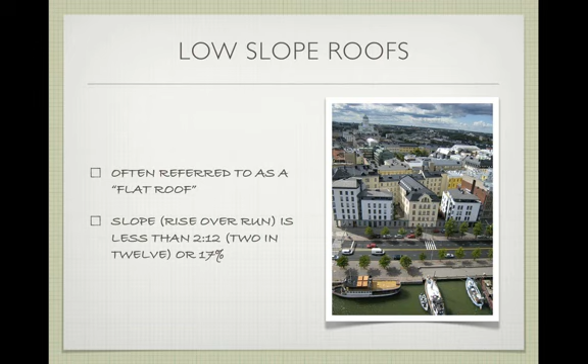The roof deck is the structural surface that supports the roof. We've talked a lot about that already, you should have a good idea of what that would be, but we'll review it a little today as well. We also have thermal insulation—obviously the roof is what's pointing toward the sky, so it's going to get a lot of direct sunlight and has to deal with a lot of heating and cooling cycles, so it's certainly something we want thermal insulation on.

We also want an air barrier, right, that restricts the leakage of air through the roof assembly. Depending on the type of roof we're going for, it may be more or less important, and we'll talk about that as we go along.

We also have something called a vapor retarder or vapor barrier. I will probably mistakenly call it a vapor barrier—we've tried to switch terminology to vapor retarder because barrier is a little too strong, it's not actually a barrier. Some moisture can always get through these, but we try to make it as barrier-like as possible. This is essential in cooler climates where you're enclosing a humid space, because you'll get condensation on the warm side of the insulation. You'll get condensation wherever you have cool and warm coming in contact.

And so that's the risky part, and you want to control where that happens in your wall assembly to make sure it occurs in the right spot, not in the wrong spot. We'll talk about that at length as we go along.

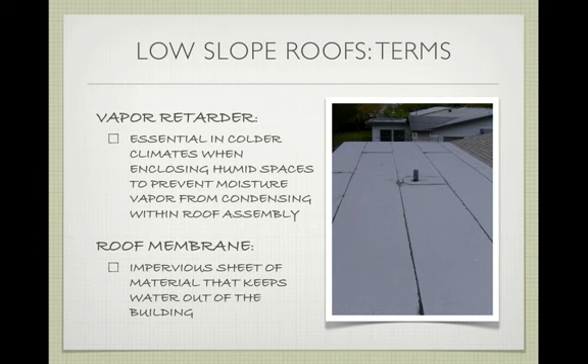We also have to think carefully about drainage. How do we remove that water, especially if the roof has a slope that goes in toward the building? A steep roof is not that hard, we can obviously see where the water is going to go. If it's a flat roof, we have to think a lot more carefully about drainage to collect and deal with the water that comes off the roof membrane.

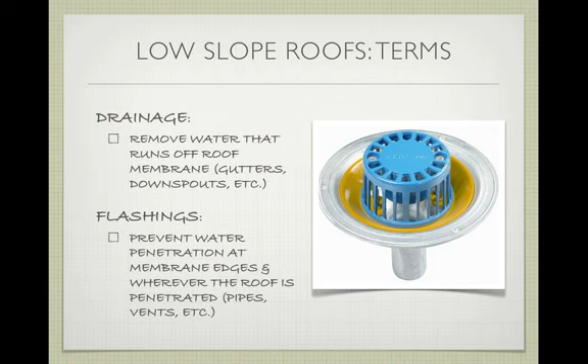And then we have something called flashings, which prevent water penetration at joints, edges, protrusions. You have a pipe that comes through the roof, a chimney, something like that coming through the roof. Flashing is what's going to deal with that and make sure that the water doesn't penetrate where we don't want it to. So now we'll expand on each one of those topics as we go forward.

We'll start with roof decks. Roof decks are the thing that we've already covered pretty extensively in the class. If you think all the way back to concrete, which I know seems like it was ages and ages ago, a simple roof deck could...

...be a concrete slab. Obviously, it's not a slab on grade, it's a slab up in the air, but it's a structural support for the roof. And obviously, on top of that structural support, we have to put the roofing. But it could be something as simple as a concrete slab.

If we were talking about light wood frame, it would be the platform that would be the assembly of all the joists, or excuse me, it's in the roof, so it would be rafters. All the parallel rafters with the sheathing attached to them. That would be this roof deck support for the roof.

If it was a steel building, we might have a structural composite deck where we had that corrugated piece of steel with concrete on top. That would be providing the deck. So it varies, and it's based on the stuff that we've already talked about earlier in the course.

The deck needs to be stiff under expected roof loads. So if we're going to get serious loading that's happening, we don't want part of the roof to sag. That would defeat the purpose of the roof. So it needs to have sufficient support to support whatever it needs to support.

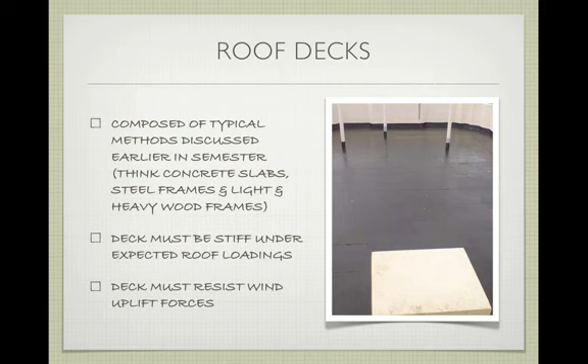Decks need to slope sufficiently toward some drainage point, and that drainage point could be off the edge of the roof. It could be to some internal drain that we're actually collecting the water, piping that through the house, and then getting it out down below, despite all of the structural deflections that might be in the roof.

So if you put an air conditioner up on the roof and it's really heavy, the roof still needs to have sufficient slope to actually drain the water off. What you don't want is for there to be a puddle around the air conditioner. And so we need to make sure that it has that.

The minimum slope for a roof that's considered to be a flat roof is 1 in 50, or about 1/4 inch per foot. So it's really not too much slope. That's why we consider it flat. But it does have a little bit of slope, and it does shed the water in one direction or another.

So here's an example of getting a roof ready. This is a flat roof, and this would be our structural deck underneath. We're seeing sheathing that's been applied here. It looks like it's 1x12s or something like that. I don't know what this building was.

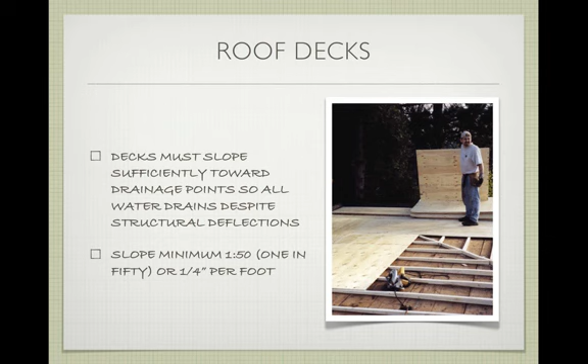On top of this, when they're re-roofing it, they put these little tiny sleepers in. If you look carefully, it's narrower here than it is up here. They're designing these sleepers to make just a little bit of slope before we put the roof membrane, or the insulation depending on the roof environment, to make sure water that falls here actually slopes away. This is like a little mini ridge or hip causing this half to drain that way, this half to drain this way. It's very subtle, but that's the right way of making sure you have that kind of drainage.

You don't necessarily have to do it with a set of sleepers on top of a flat roof. You could adjust each one of the individual joists so that they have a little bit of slope to them, or shave each joist so it's narrower on one end and taller on the other to get that slope. Those two methods take a little bit more work and pre-planning than putting sleepers on after you have a nice solid roof deck.

It's going to vary depending on your current conditions and how you're building. We can vary the heights of the columns underneath - let's say this was a steel building, we can vary the height slightly to get that slope. That's one way. We can apply flat or tapering insulation to try to get that slope, rigid foam or some kind of lightweight insulating concrete. You could actually put a lightweight concrete deck on top of your structural deck and have that have the slope to it. So there's a variety of ways - the point is, it has to have slope, even if it's a little bit.

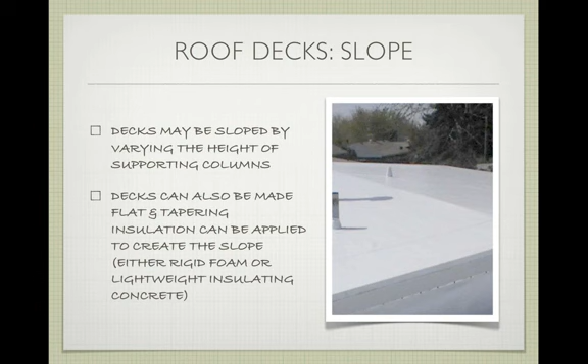So why is this a big issue? If you have insufficient slope, you can have something called ponding. If you've ever been in a tall building and looked down on other shorter buildings after a rain, there's a lot of this that happens on roofs. This is a very dangerous thing to have happen. What we mean by ponding is that when water is applied to the roof - rain, snow, etc. - there are areas of the roof that don't have sufficient slope and puddles form. It's like puddles that would be outside, but these are a little bit worse for what they do to the building.

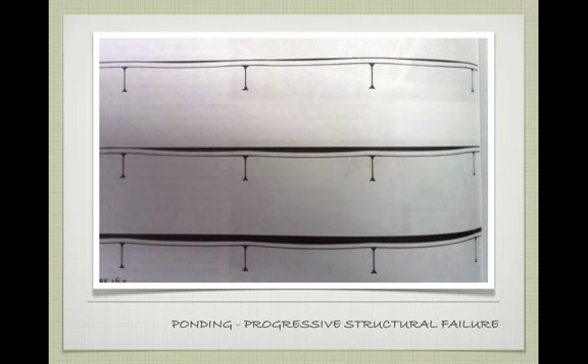Number one, ponding can destroy the roofing membranes themselves, which leads to leaking, and if you get sufficient leakage, that could cause rotting of the structural members and ultimately structural failure. The other thing is, as the ponding grows, we're adding a lot of weight to the building. How much does water weigh per gallon? It's like 8.5 pounds. So if you think about ponding - gallons and gallons of water, you're adding weight each time the rain falls. If it's not draining off, it's adding weight to the building, and as that happens, the roof starts to sag and we start to have problems. Make sense so far?

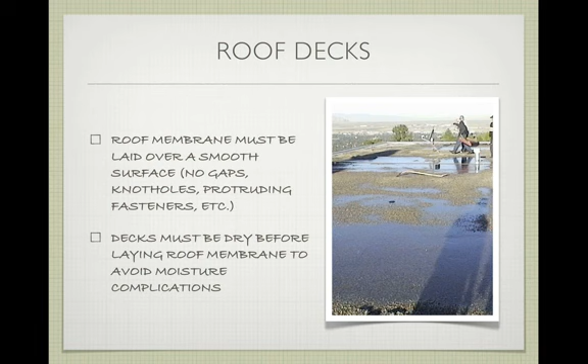The other thing is that decks need to be dry before you apply this membrane, to avoid moisture complications like mold. You don't want to be applying one of these roofing membranes in the rain when it's wet - you want to make sure the roof deck is actually dry.

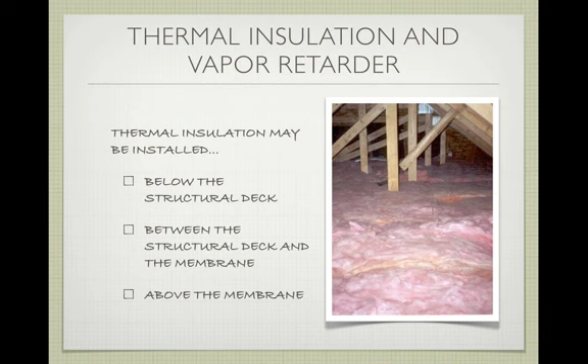So, thermal insulation and the vapor retarder. The thermal insulation can be installed in 3 places: below the structural deck, between the structural deck and the membrane itself, or above the membrane altogether. So we have 3 different locations for it, and we'll talk about what those mean.

So the last piece of this puzzle is the vapor retarder, and we're going to talk about where it belongs in the next 3 slides, and hopefully that'll help a little bit more.

The discussion about a vapor retarder varies depending on where we are and our climate. What we need to pay attention to is what is the warm side and what is the cold side. If we're in California, in the Bay Area, the definition of warm side and cold side is a little problematic, because in the middle of summer - or even right now, almost May with air conditioners starting - the cold side might be inside and the warm side might be outside. In the middle of winter it's exactly the opposite: the cold side is outside and the warm side is inside.

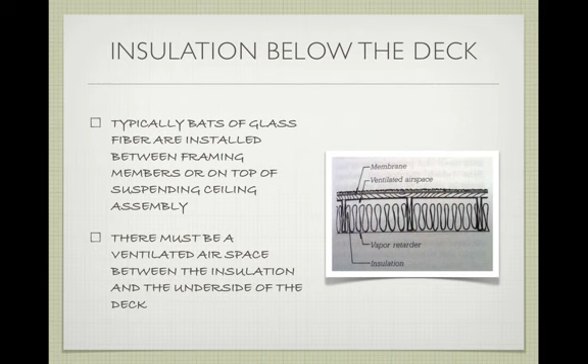If we flip things around, say we were in Hawaii, and we wanted the inside of the building to be cold, with the outside being the warm side—or maybe it's the desert—we would change the position of this vapor retarder to be on the warm side of the insulation. So the vapor retarder would be on the outside of the insulation rather than the inside. Does that make sense? Because we want that condensation to form on the outside of the insulation. So it's going to vary depending on your climate, and that's the important thing to understand.

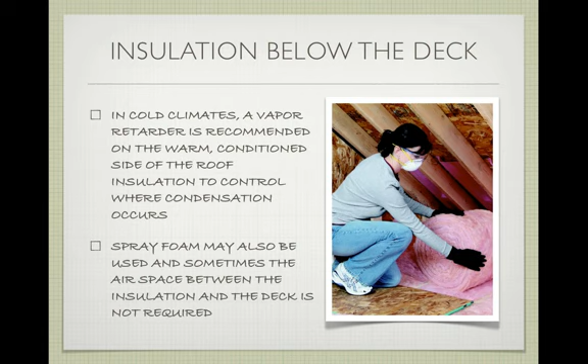In cold climates, this is basically what we talked about: the vapor retarder is recommended on the warm conditioned side of the roof insulation to control where the condensation occurs. You can use spray foam depending on the type of insulation and the type of deck you're going to use, but again, the vapor retarder is still very important.

In cold climates, remember the vapor retarder needs to be installed below the insulation, which is a bit complicated and a bit awkward in terms of placement. So what you'll end up doing is using a special topside vent that will allow that moisture to come out—specialty vents put in for this kind of situation, just to get rid of any moisture that might condense.

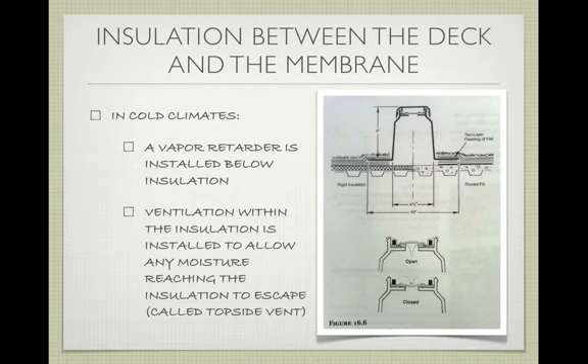So where you put that vapor barrier varies. Likewise, if we switched climates—I'll stick with cold for the most part, but recognize if we switch to Hawaii, we'd have to change the placement of the vapor retarder—what about putting insulation above the roof membrane?

This is usually called a protected membrane roof, meaning the membrane itself is protected from temperature extremes—we no longer have extreme hot or extreme cold right on the membrane since we've got the insulation in there. It also means the membrane itself acts as the vapor barrier, because it's a waterproof barrier, so we don't have to worry about a separate vapor retarder or vapor barrier. That's also an advantage.

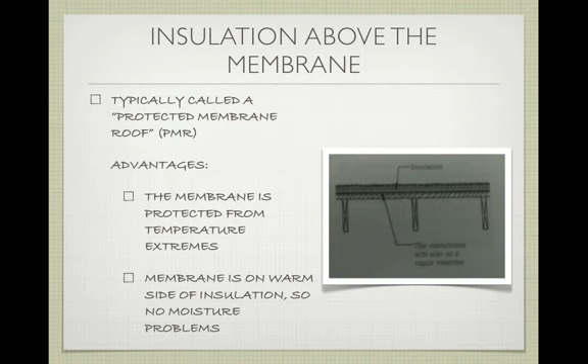The disadvantage is that the material needs to retain its insulating properties when it's wet. Fiberglass batts are the worst example of this—you lose almost all insulating value if the fiberglass batt gets wet, which is why if you have severe water damage or a flood in your house, you're worried about that insulation and need to get it out and replace it with new insulation. So we need to make sure the insulation can be exposed to water and doesn't degrade when exposed to water.

Some types of foam are fine, other types are not. They might soak up water or resist water. The other thing is that the membrane can't decay or disintegrate when it's put out in the sun. If you've played around with foams, some you stick out in the sun and they start to deteriorate in the weather, while others retain their rigidity and insulation properties. So it's going to vary a little bit.

So this is an example of one of these assemblies. Sometimes they'll put this little skin on it that'll help with sun, and it also helps with traffic so you don't accidentally dent it or destroy it. There's our insulation, down here is our roof membrane, and below that is our roof deck itself.

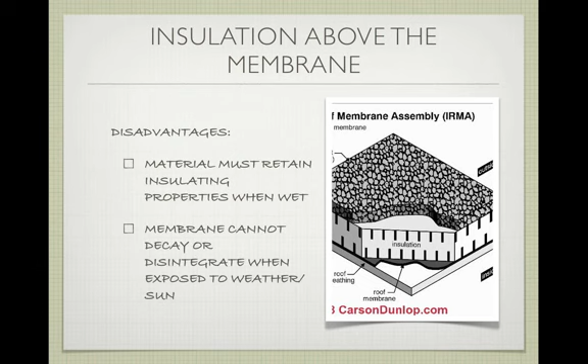In terms of thinking about rigid insulation as a material, it should have high thermal resistance. Obviously the point of insulation is not to allow heat or cold to come into the building, so it needs to have high thermal resistance. It needs adequate resistance to compression, denting, gouging, decay, and fire. This shouldn't be too hard to imagine - if you walk out on it and it compresses, that defeats the purpose of the insulation, so it needs to be able to support some weight.

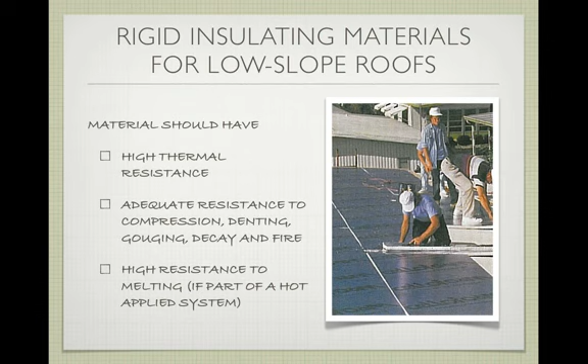It also needs to have high resistance to melting if it's part of some kind of hot applied roof membrane itself, which we'll talk about in a second. So if you're applying a hot membrane as your roofing material and you put this insulation in, it can't melt - it needs that high heat resistance.

In a low slope roof, there's typically two layers of an asphalt saturated roofing felt, which I'll pass around an example of, that are adhered to the roof deck with hot asphalt. And so this is acting as the vapor retarder in this low slope roof.

You can use what's called the self-adhering bituminous membrane, which is also very common. So this here would be the self-adhering membrane - when I pass it around, go ahead and peel a little bit back and you can see that it's sticky. So this would be a cold applied system. I can take a roll of this, peel off the backside, and stick it right down to my deck. That's cold applied - it doesn't require any heat.

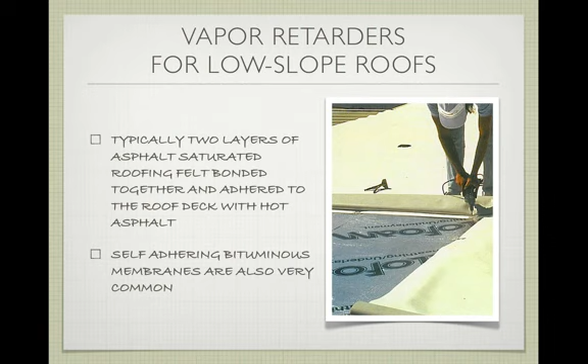Or we could have roofing felt - that's probably the best example. A piece of roofing felt is an asphalt impregnated felt. Think of asphalt like we drive on, it's a distilled petroleum product that's been saturated into a felt. So we're taking two layers of this with some very hot asphalt at the same time, and we're applying those two layers together to create this membrane. Does that make sense? I'll pass this around so you can see that, but we're going to talk about it in far more detail as we come up here.

Exactly, and that sticks the whole thing together, and that would be considered a hot applied application, because you have to heat up the asphalt to cause them to stick together.

So the vapor retarder must be located within the assembly on the warmer side of the insulation - we should have gotten this by now - except on a corrugated deck, where you need some kind of substrate board across the decking prior to the application of the vapor retarder. I don't know that I actually have any vapor retarder up here, but you're all familiar enough with plastic to know what I mean - you can think of it as a sheet of plastic. There are smart membrane materials that allow some water to penetrate one direction, but you get the idea.

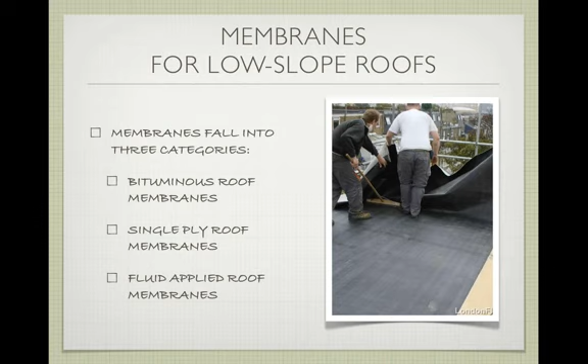Generally speaking, membranes fall into three different categories: the bituminous roof membrane, the single ply roof membrane, and the fluid applied roof membrane. We're going to talk about what they all are and the advantages and disadvantages of each. So we'll start with what's considered the built-up roof membrane.

It's assembled in place from multiple layers of that asphalt impregnated felt. We keep losing some of our ballast on this example year after year as it's being passed around, so be somewhat gentle with it. But this is the best example of seeing those layers built up - this is a piece of roof membrane that's been cut out, and if you look carefully at the side, you can start to see the various layers of that asphalt felt.

And then on the top, this last surface, which is rocks, is a ballast, which we'll talk about in a second. So pass this around, but it can help you see the thickness of these layers as they start to come together.

The felt that we're going to use, like the sheet that I passed around, is delivered to the site in a roll. The width of the roll varies a little depending on the equipment used, but it's going to look something like this. In this particular example, they're actually loading it into a machine that helps roll it out, which definitely assists the process.

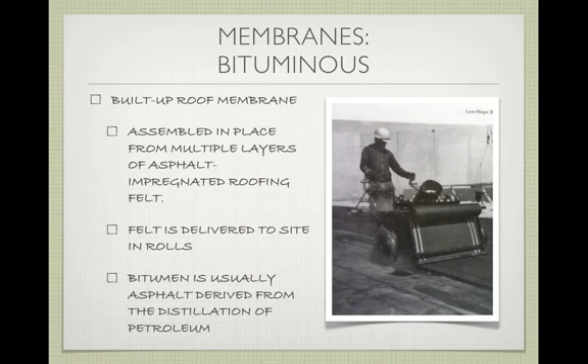The bitumen is usually an asphalt derived from a petroleum distillation process. So it's not the asphalt we think of that's out on the highway with rocks already embedded in it—it's more of a liquid product that helps these layers adhere together. It's applied hot in order to merge the saturant already in the felt with the new saturant we're putting in. So it's basically like saying you have something already filled with glue and you add a little more glue to bind the two together.

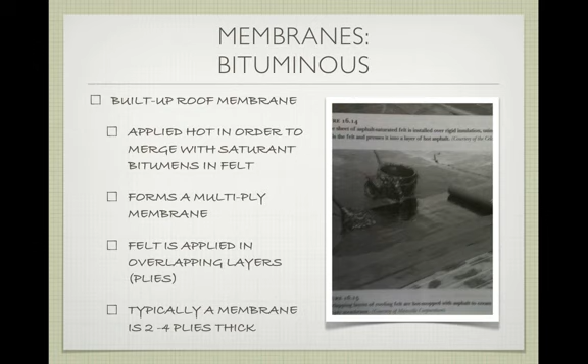It forms a multi-ply membrane, and the felt is applied in overlapping layers, which is important to make sure the seams overlap so you don't have a crack that goes all the way through. It's kind of like shingling in a way. Typically a membrane is going to be anywhere from 2 to 4 plies in thickness, and a ply is just one layer of these.

The last piece is that there's a layer of crushed stone, or a layer of rolled roofing that already has mineral aggregate put in it, something like this. That provides a protective layer on the top surface, both from the sun and from potential traffic. There are other ways of making sure traffic areas are more protected, but you want something on top of that roof to protect it from traffic.

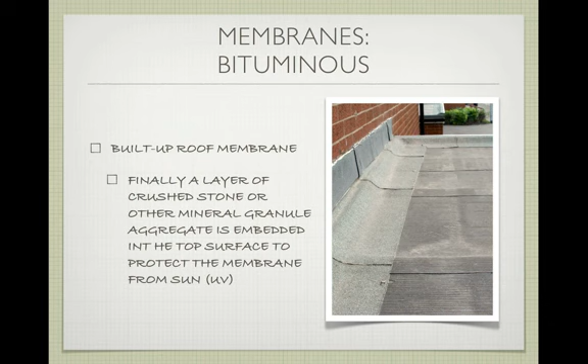So let's look at the actual drawing. In this particular installation, we're putting our asphalt here. You know, sometimes you get so tongue-tied that you just can't get out what you're trying to say.

So in this particular example, we have a concrete deck—that's our supporting surface. On top of that, we have an asphalt primer coat, which is basically a hot asphalt that's been applied to the deck itself to seal it up and give us a good surface to adhere the felt to. We're going to lay down overlapping layers of this felt. On top of that, we're going to put in some more asphalt.

Then we're going to put our rigid insulation boards down, and on top of those rigid insulation boards, we're going to put an aggregate. So this particular assembly is where the roof membrane, all the layers of felt, are below the rigid insulation—this is where the insulation's on top.

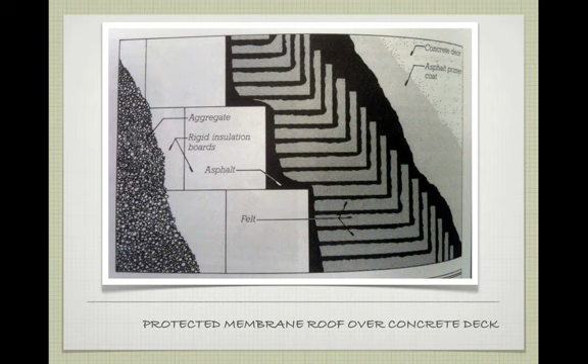When we move on to the next slide—well, I guess I don't have it, we'll see that slide in a little bit—we have some other options that are also available.

It's a lot like something like this. This one doesn't have the adhesive on the backside, but it's a lot like something like this, where instead of a felt, it's actually a synthetic product that's stronger and more water resistant. We can swap that out for the felt, so it's not going to be a hot applied system, it's going to be a cold applied system. But you guys get the idea. I apologize I don't have one—I thought I did have one, but I don't.

So this increases the flexibility of the material. It allows it not to crack as easily in different temperature extremes. It's a little bit more like switching from regular wood into an engineered lumber product - we're trying to use our knowledge of technology to improve what we're actually using, so it's a little bit tougher.

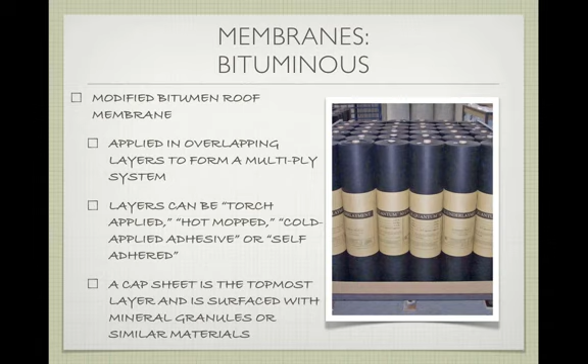When you're designing your units, are you choosing what type of roof and insulation before construction, or does that happen during construction? It should happen before - that's a good question. Because you as the architect or engineer should have knowledge of what type of roof you're going to do, since it's going to vary a lot in the construction process.

If you're doing batt insulation on a light wood frame, you're going to be doing the roofing one way. If you have corrugated steel like this, you're going to do it differently because of the surface it presents to you. If we had a slab surface, we'd do it differently - if it's a slab, we have no cavity to put insulation below the deck, so we have to put it on top, and then it's a matter of deciding whether we want it underneath the membrane or on top of the membrane, which depends on what you're trying to do.

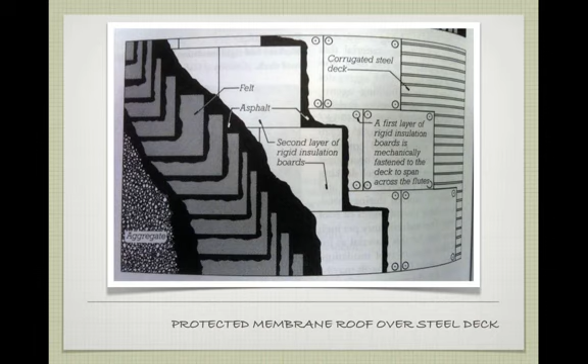What product you're trying to use, which you probably would specify. What look you're going for, how much traffic is going to be on the roof - all of those things come together, and you as the designer should probably decide that in advance. That said, it's probably not decided 100% of the time. You could get to the point where you hire a roofing contractor and they just do it. But it depends on the scale of the project - if it's a large project, it's going to be decided ahead of time.

So the other thing we can do, instead of having these multi-layer, multi-ply assemblies, is have something like these single-ply roof membranes that I'll pass around in a second. They have some serious advantages - it takes a lot less labor to roll out a giant sheet of this single-ply roof membrane across the entire roof, fasten it down, and move on. We don't have all these layers coming into being. It's also very strong, very durable, and very elastic. It works as a sheet that almost floats across your roof - kind of like covering your building in plastic.

But if you look carefully, especially that one which has fuzzy edges to it, those are nice strands either of fiberglass or another very strong material in tension - and we'll talk about glass next week actually being stronger than steel in tension. So you're using a lot of really strong materials to engineer this roof membrane, so it's a lot stronger.

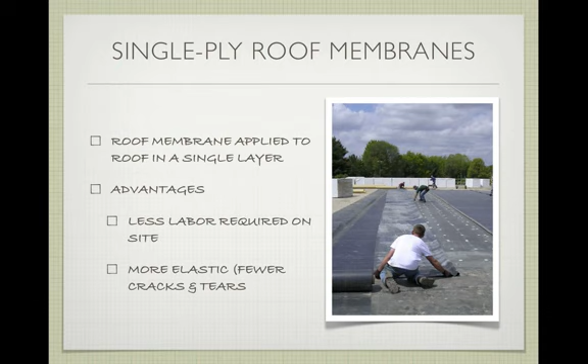That said, there are some serious disadvantages to using something like this. It needs to be affixed to the roof by either an adhesive, some kind of ballast, or a mechanical fastener. If we're using adhesives, the adhesive has to be compatible with whatever this roofing membrane is - we can't use hot asphalt if the single-ply roofing membrane isn't resistant to that heat. We have to know the chemical composition so the chemicals in the adhesive don't degrade the membrane itself. If we're using ballast, that just means covering it with rocks or something to weigh it down - you run the risk that those rocks have something that could puncture the single-ply roof membrane, which is problematic. Obviously you don't want it punctured. Or you need to use some kind of special fastener, and this is where it gets tricky, because you've got a fastener attaching this to the roof which is a potential point where it's going to leak, so you have to make sure it doesn't leak.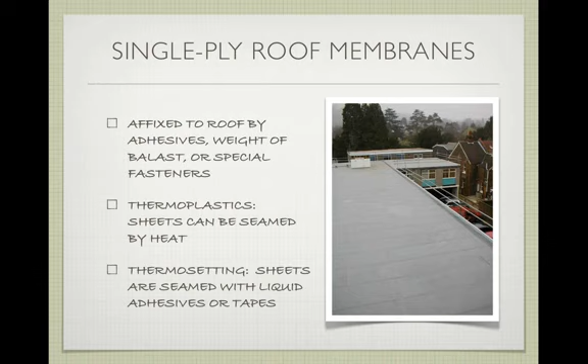So we have thermoplastics - these are sheets that can be seamed with heat, they're designed for that. We have thermosetting sheets - these are seamed with a liquid adhesive or a tape or something like that, because you might not get a complete sheet that can cover your entire roof. You might have to piece them together, so you need some way of doing that.

The big problem with something like that is there's only a single layer. So if something were to happen to that topmost surface, that membrane itself, some little nick, you don't have any redundancy. If you have a multi-layer, say 4 plies of roofing felt, and something happens to the top layer, it's not the end of the world - you've got 3 more layers to help stop the water. If you have something like this that's only a single ply, you have to be much more careful about any little nick, because that could really cause a big problem instead of a little problem.

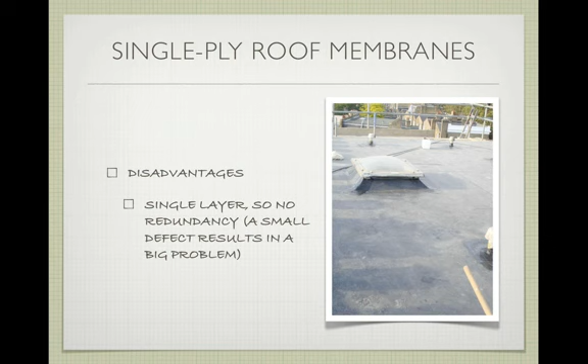So one more note about those single-ply roof membranes. I did one job that had one of these single-ply roof membrane roofs on it. Jonathan, you have a question?

So anyway, I did this one project where we had one of these roofs, and we needed to cut a vent through the roof to exhaust the dryer. We were putting a laundry room inside, and the only way to vent this particular laundry room was part of a 4-plex.

It had to vent out through the roof—that was the specification the city gave us. So we had to cut through this membrane, which is inherently challenging because the whole point of having one of these nice seamless membranes is not to cut through it. We ended up hiring a roofing contractor, even though normally we'd handle roofing ourselves, because it was a specialty thing. It was a special membrane, and they had to work around it with other types of membrane that had the right thermosetting properties to seam it in. It's the kind of thing that makes me really nervous, just having this one membrane.

Right? What does the person choose? It could be cost, right? Yes, it costs a little bit more, but the labor cost is much less. Sorry, clearly I forgot to put my phone on vibrate.

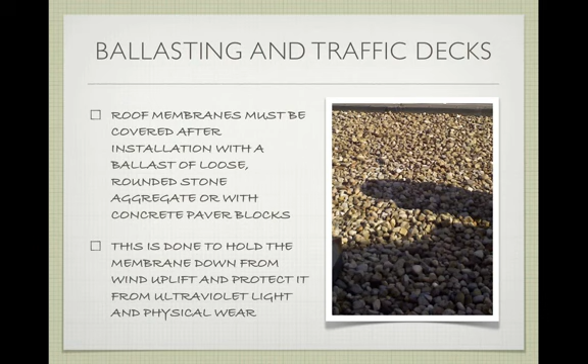It protects the roof membrane from ultraviolet light and from physical wear, which is actually a pretty big problem. So if we want to make a rooftop garden, we need to cover up this roof membrane with a material that allows us to walk on it. That's what a traffic deck is designed to do - it gives you a walking surface.

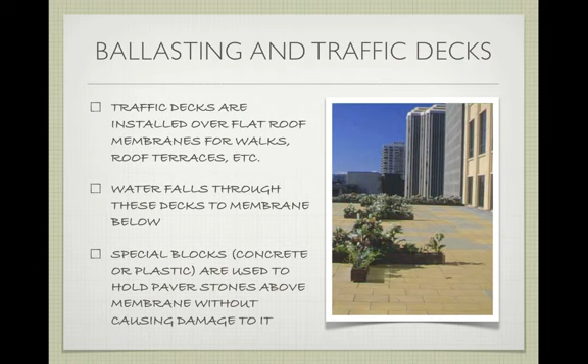The only problem I've seen with this sort of thing is if any debris, any little leaves or particles get in there, you can end up causing little dams underneath the paver stones that don't let the water flow as freely as you'd like. So sometimes there's periodic maintenance where you have to pull these up and clean out underneath so they can continue to flow. The last thing you want is debris causing a puddle - ponding to form, which we all know is a bad solution.

So we'll go through a variety of examples here talking about edge conditions, because this helps to see how this stuff is made up. This is an edge condition here - we have a curb built up on the side, making sure the membrane itself goes higher than the surface of the deck.

This is important because we're not trying to drain to the outside, we're trying to drain to an interior drain, and we want to make sure there isn't an edge that can cause a crack or water penetration. So we come up so there's plenty of space that's not allowing water in. Notice all the roof membranes applied together, plus an extra layer right on this top surface.

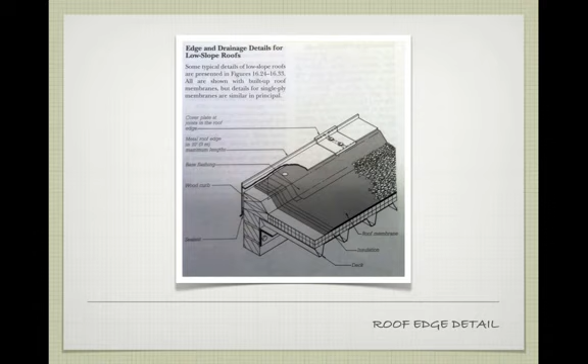Then we have a piece of flashing right over the edge itself. So we're controlling the water so that water falling here flows down into the roof, and this edge is covered on both sides. This has that little metal drip edge, like we talked about last week, to make sure the water drips away from the building itself. This is a special clip that holds it down into place.

This is at a scupper detail. On these kinds of buildings - and chances are you've probably noticed this without paying much attention - what we're talking about is a place deliberately cut at the level of the roof deck that allows water to come out. They'll often have a little decorative downspout piece that collects the water from the scupper and brings it down the side of the building.

Or it'll just have a little square piece that extends out and allows it to drip off the edge - just depends on how it's designed. So this low point is where water is actually allowed to flow out, and the way this is built up is slightly different.

This roof should slope toward this point to make sure the water can actually get out. It wouldn't do any good to have this scupper cut higher than the roof deck itself - that would defeat the purpose. So it needs to be low enough to get the water out. Notice that this piece of flashing goes underneath this layer of felt to make sure the water running across here continues over the flashing and doesn't get caught underneath it.

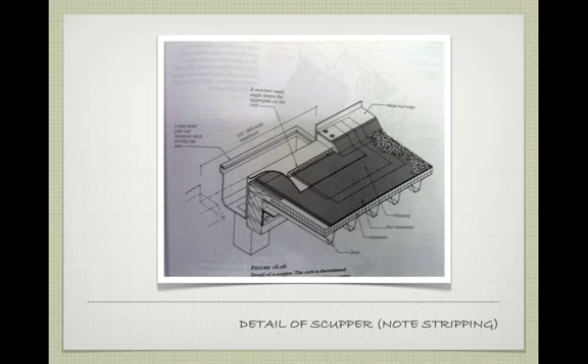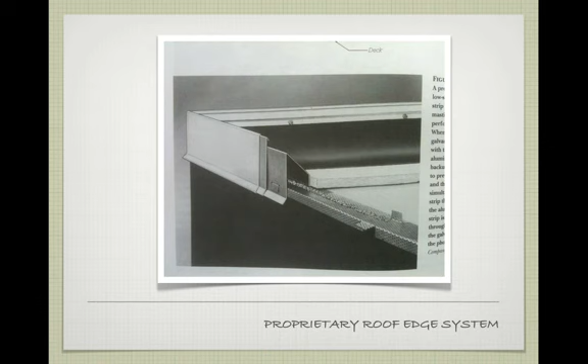Another example of this is a proprietary roof edge system. It's a little bit smaller, doesn't require all that block, but you can see we've got this going underneath, and this looks like a form of insulation. On top of this, there'll be a bit of a membrane that'll bridge that gap. There's plenty of proprietary systems, and they're going to vary.

If we have a building separation joint, where two adjoining buildings or two pieces of building come together—think San Francisco row houses—we need to deal with how the roof decks come together. Each side builds itself up to a little sub-wall, and on top of the wall that comes together, there's a little piece of flashing that caps the wall and keeps water from penetrating down. Any water that falls on this side hits this little metal drip edge, drips away, and runs down into the roof itself. Likewise, water hitting here flows down into the roof surface, same on the opposite side.

This little thing is a compressible joint, designed for expansion and contraction of the buildings. Sometimes this can be even a bit bigger because it's designed for seismic separation of two halves of a building. It's going to vary.

There isn't a good example around here of a good seismic joint. There's a lot on the Berkeley campus—the architecture building's a really good example, because there's a tower on one half and a 4-story building on the other half. Right where the two buildings meet, there's a seismic joint that runs all the way through the building, so you can walk around and see where that joint is and how they're separating the building while still dealing with these waterproofing conditions.

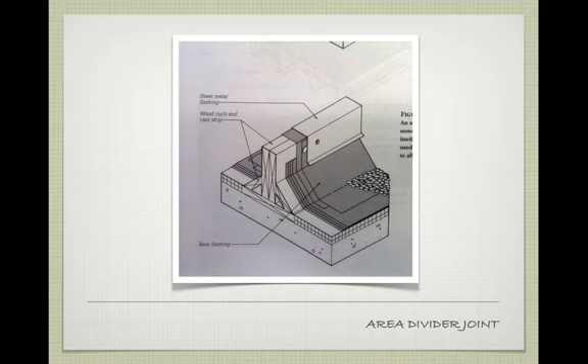If we have an area divider, this is on a larger building where we're trying to get parts of the roof to slope one way and parts the other way. This is a way of dividing the roof into sections—not necessary, you could just have the roof slope one way and the other, it just depends on who's designing the building. This is very similar to the building separation joint we just saw: a little vertical wall with a cap over the top, making sure any water that falls goes to one side or the other, away from the joint.

This condition is a little parapet wall, where the wall extends up beyond the surface of the roof. This building would be a good example if we walked outside, not the little gap but further along. This is the kind of thing I'd love for us to go up on the roof and talk about, or at least go into a tall building and look down on the roof, but we don't have that option right now.

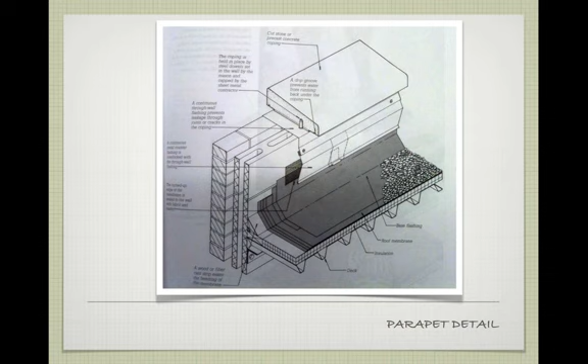In this particular example, we still have a metal cap, a little flashing cap that goes underneath the decorative concrete top of the wall. That flashing cap makes sure any water that penetrates through the grout lines or little cracks runs to one side or the other. There's our drip edge, on top of the multiple layers of asphalt, making sure any water goes into the roof membrane and not into the wall itself.

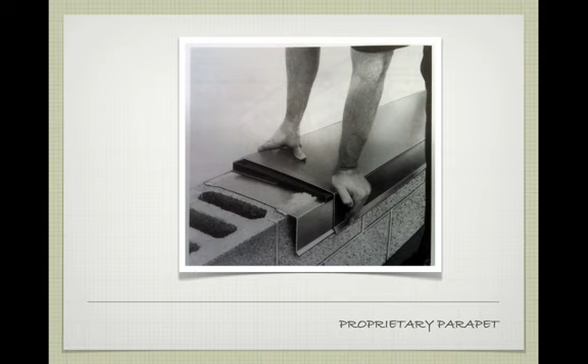Proprietary parapet cap. This makes me nervous because there's no waterproofing at all applied to this wall in the little drawing. My guess is it's just a demonstration of how it would work.

If we have an interior drain, in this particular example it's a conventional cast iron interior drain. The best way to think of it is like a shower drain—if you're in the shower and you look down, the water needs to go somewhere, and it needs to be waterproof to get into this drain and then travel through the building. In this example we're doing the same thing, like a giant shower pan where we're draining to one point.

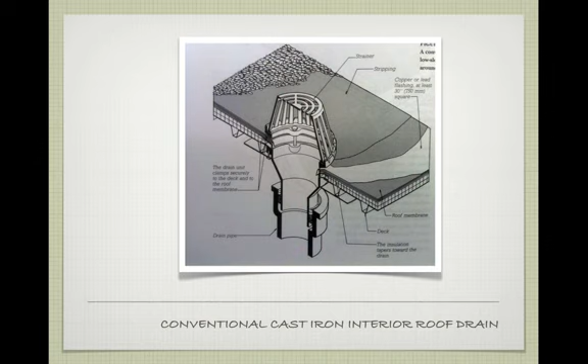This strainer is designed so leaves don't collect and clog it, so it will drain. The worst case scenario is leaves getting clogged, this backs up, causes ponding on the roof, and leaks out one of the joints somewhere. That's exactly what we don't want to have happen, okay?

If we have a vent pipe, remember last week we talked about waste plumbing needing a vent that comes up through the roof membrane itself. We have to frame around something like that. This is in the flat roof environment, using the same strategy as at an area divider or building separation, like a little wall. We're doing the same thing here with a sheet metal cap going around it to make sure anything that falls on and around this drain drains off onto the roof membrane.

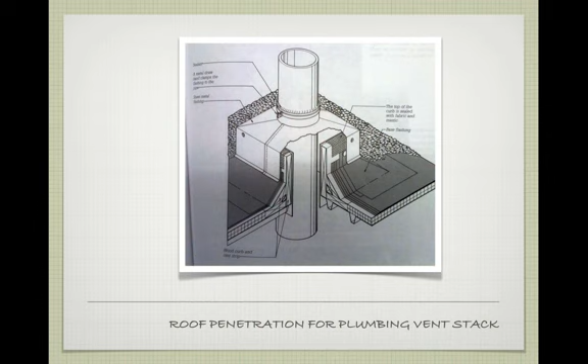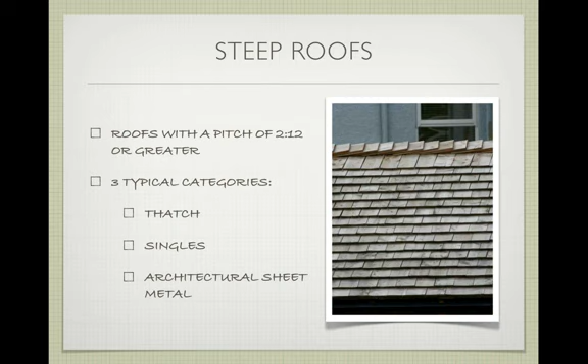We'll move from there into steep roofs. I don't have as much to say about steep roofs today because we talked a lot about them in last class, so a lot of the edge details are the same and I don't want to repeat myself. But we'll talk a little more about the roofing material. There are 3 typical categories: the first would be thatch, the second would be shingles, and the third would be architectural sheet metal. Now we'll talk about what each of those are and how they work.

Insulation and the vapor retarder are usually installed below the roof deck in a sloping roof. If you climbed up in your attic, chances are it looks something like this. If you have vaulted ceilings, it would be in the roof cavity, but generally the sloping roof environment is going to be a light wood frame or heavy timber frame building. It's less likely to be Trader Joe's or something like that, a steel building or concrete building. Doesn't mean it can't happen, but it's less likely.

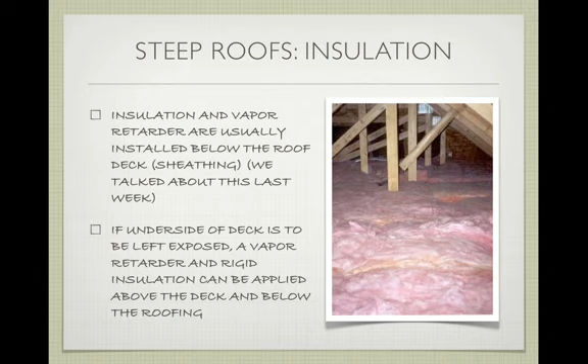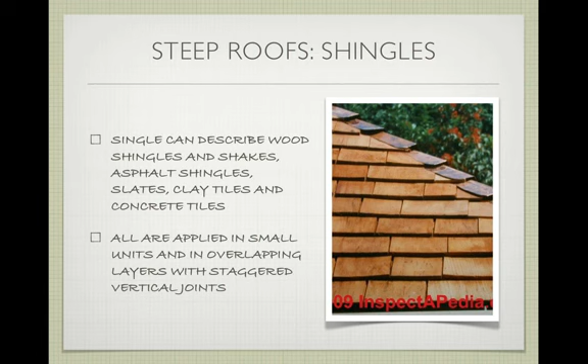Shingles can describe wood shingles, shakes, asphalt shingles, slate, clay tiles, concrete tiles - shingles is just kind of the generic term for that. Doesn't mean it's all these little tapering wood pieces. They're applied in small units in overlapping layers with staggered vertical joints - this just means every one of these joints is always going to not fall on one of the joints below, whether it's a concrete tile roof or a wood shingle roof, doesn't make any difference. It's applied the same way.

So wood shingles are thin tapered slabs of wood. This is the only example I have here of just a plain old raw shingle. Unfortunately, it has a scalloped end to it, so it's not quite what I'm showing you here, but you guys get the idea, and I will pass it around so you can see that. It's tapered, sawn from the tree trunk with the grain running parallel to the face of the shingle, which is important.

Ideally, it has no knots. It's perfectly clear, which that one is, because if you had a knot, there's a point where water is going to go through, and that's exactly what we don't want in a roof environment.

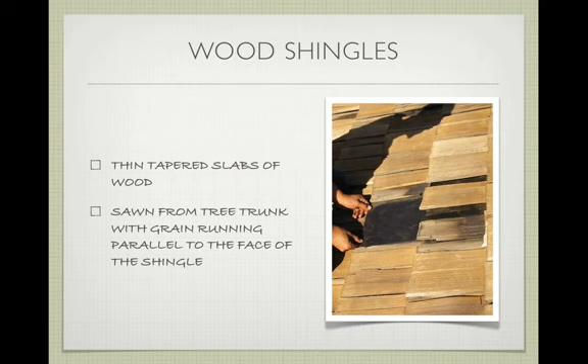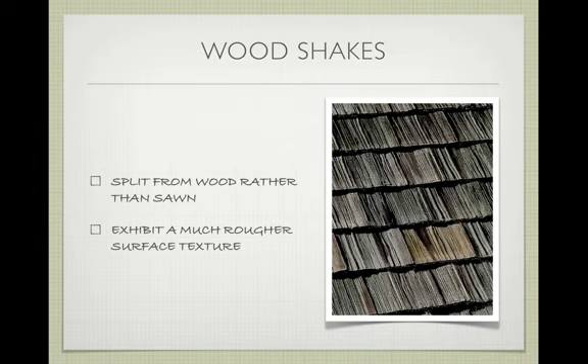Shakes, instead of being sawn from the wood, are actually split from the wood, so they have a much rougher texture and a bit different look. There are still roofs like this floating around from the mid-50s. Sometimes they're shingles that have just weathered a lot, but most of the time they're actually shakes that have been split. Shakes are usually a little bit thicker than shingles. That's a typical shingle, much narrower, maybe a quarter inch, at most three-eighths. Something like this can be a half inch and larger, so it's thicker, and it has a different texture.

This is usually made from some kind of decay-resistant wood. It wouldn't make sense to use wood that wasn't decay-resistant — that's the point, since it's exposed to the weather and we need that decay resistance. So it's going to be redwood, red cedar, it could be white cedar, or Chinese cedar, which isn't actually part of the cedar family but is still decay-resistant, just slightly different. It's recommended to be applied over either a breather mat, which I'll talk about, or some kind of continuous airspace underneath.

If you have an older house with a shingle or shake roof and climb up into the attic, you'll see what's called skip sheeting. Instead of having a board that's continuous across the roof sheeting, like we'd do today with OSB or plywood, you have boards that run in a certain region, then there's a gap, then another board. So when applying shingles, one course is nailed to this board, and when you move up, it's nailed to the next board, and so on. This allows air underneath the shingles so the building can breathe, instead of having one side exposed to weather and the other not.

If we were on a building with a vaulted ceiling built today, with roof sheathing applied, you'd use some kind of membrane — it's not really a membrane, more of a mat — that would allow for this ventilation.

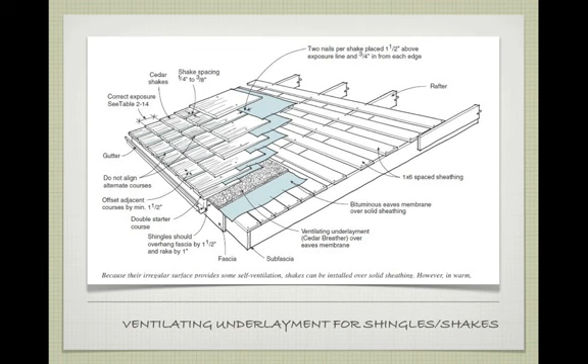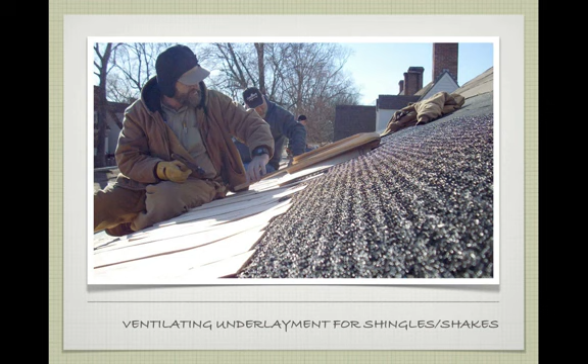Here's a picture of this membrane on the next slide. The only thing I could find are waterproof membranes for a foundation, but it's similar in concept — something made of an expanded mesh that allows air underneath the shingles to breathe. I'm not going to pass these around since it's not actually the product, but it's very similar. It's kind of like an expanded spun plastic, like a Brillo pad. This is designed for breathability, so air can pass through and the undersides of the shingles can dry out if they get wet.

If we move into asphalt shingles, here's the color spectrum of asphalt shingles. You can see a variety of these in a variety of colors — I'll pass these around so you guys can see. They're die cuts from sheets of the asphalt-impregnated felt we talked about, and they usually have granules applied to the surface.

When I say they're die cut, they're designed to look like shingles. The simplest is a 3-tab shingle, which has 2 cuts along it to make it look like a shingle. Only the lower section has those cuts. It glues in with the rest of the assembly, and when you layer them up, it looks like a shingled look.

As you move into the thicker shingles with thicker butts, what they're doing is layering up multiple layers of this product, multiple layers of felt to give it a little bit more texture, make it look a little bit more like a shingle roof would look. So you can change the look of it based on the thickness of the material itself. It usually comes in a 12 by 36 inch sheet, which is very, very heavy.

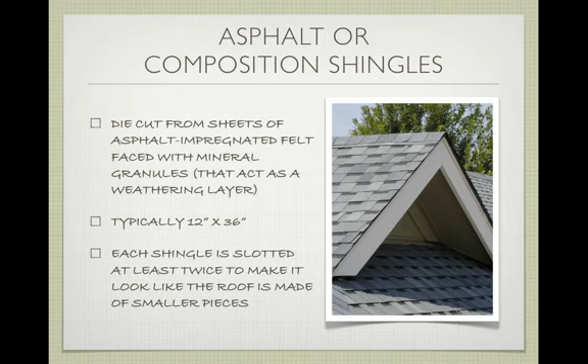That would be something that's dead load, adding to the weight of your building itself. So it's designed to make it look kind of like shingles. Depending on the grade and the quality, it's going to look more or less like a shingle. It's pretty inexpensive, it's pretty quick to install, and it's moderately fire resistant. So if you were in a wildfire and you had a burning ember that landed on your roof, it's not going to be as bad as a wood shake roof, but it's not going to be as good as a concrete tile roof. So it's somewhere kind of in the middle.

It says it lasts 15 to 25 years. You can buy a 30-year roof, you can buy a 50-year roof. Those numbers are completely bogus. You cut the number that it says in half at a minimum, and that's kind of what you're looking at.

This is one of those things that's a great illustration of how marketing works. So let's say you buy a 30-year roof, and it's guaranteed for 30 years. What that guarantee is basically saying is we will refund you a portion of what you paid for the roof if it fails before 30 years. But that refund is not the whole cost of the roofing — it's a prorated amount based on how old the roof is.

So if the roof fails at 15 years, they might give you a quarter of your money back. Which doesn't really help you in the grand scheme of things, because that means you're going to buy more roof — chances are from them or a similar company. And when you buy that roof, you have to pay somebody to install it in the first place, so they're not refunding any of the labor involved. Just because you buy a 30-year roof or a 45-year roof doesn't mean you're off the hook for 45 years. It doesn't really work that way. So something to be aware of.

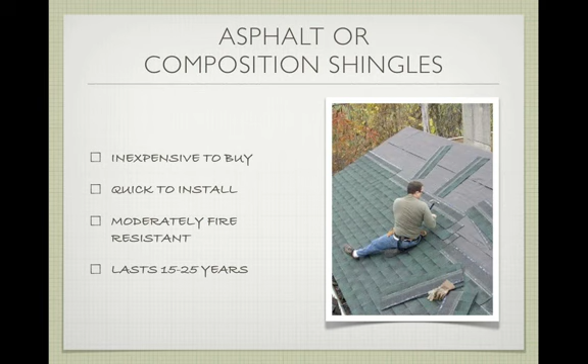We'll start in one corner with what's called a starter roll, and a starter roll is half of the shingle — it's the back half. We put that down so that it has enough thickness on that lower portion, because otherwise we have a single layer there instead of a double layer like everywhere else. So we start with that starter roll. There it is — it has a little bit of glue that's pre-applied to the bottom of the roofing.

I thought I had one of these. It's really bugging me that I don't have one. Hold on. We have lots of samples.

It's glued in. So this tells you that the stuff actually is very sticky, right? Anyway, this is a very poorly put together roof, but here's what we're talking about with that membrane underneath. This one isn't even an actual shingle, it's just showing you, but it should have these little bits. We're going to put this away, so poorly put together. We'll get rid of that and pretend like it didn't happen. We'll go back to the drawing.

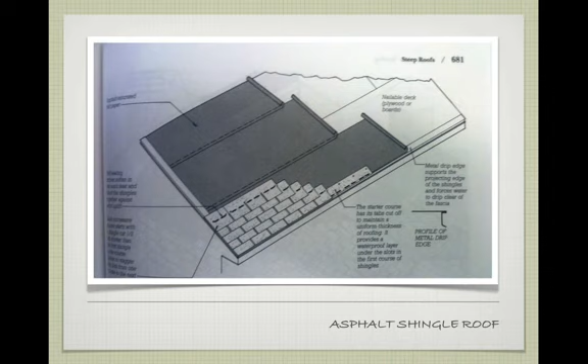You do nail the roof as you go along up here, above where the seam is. On a piece of roofing, there's usually a little line that tells you where you're supposed to nail, and you use roofing nails which have very fat, wide heads in comparison to the body of the nail, to make sure it has a lot of surface area to hold that piece of roofing down.

When we get all the way to the ridge, we can use some kind of ridge vent if we want. Here's an example I'll pass around of a ridge vent that has an asphalt shingle top to it. We would have our asphalt shingles showing up underneath - there's a tiny bit of one in the corner, so if you look carefully you can see it. This is applied over the top of the roof. Notice there's a gap in the sheathing, so that you get the air to actually flow out through this hole. But this is a good way of understanding how the roof cap would go.

You can instead just have what are called ridge units, which are little folded pieces of asphalt roofing designed to be along the ridge that cap off the top of the roof itself. Sorry, I'm scanning to see if I see one that's up - sometimes they're up high, but I'm not seeing a ridge unit. Clearly I have to bring in a few of these so we can actually pass them around.

If we have a valley condition, we have a couple different ways we could choose to deal with it. We can put in a sheet metal valley and hold the roofing back as we go along. This is really nice for collections of debris and stuff - if you're near trees and you want those leaves to be able to run off the roof easily, this is a good solution to that.

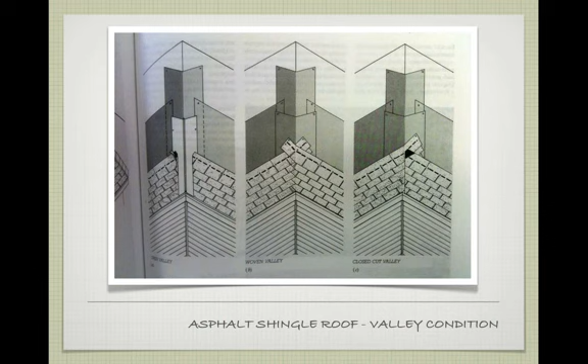We can weave the corners where we have one piece of roofing that goes up this way, the piece under, and as we go up, the next piece would go over the top, and they're woven. The other example is we can take one side of the roofing and continuously wrap it, and the other side can become cut. So there's slightly different looks to the corner in terms of what you're after architecturally.

We can move into slate shingles, which I think I pulled a couple of examples. Yeah, here we go.

Slate is delivered to the site, split and trimmed to size. This is done ideally in a factory setting, because it's easier than doing it on site, since these are very, very thin pieces. Remember when we talked about stone, we talked about slate naturally having little cracks in it so that you can split it into very thin sheets. That's how these are done.

These have been gauged so they have the correct thickness. The edges have been chipped a little bit so they have a little taper, for the look of it, so it's not a perfectly raw, natural piece of slate. Likewise, it's been squared up very nicely. This piece has been broken a few times, and I think it's designed to go more like this, so it's a little different exposure. But you get the idea of what the material is.

It is a natural stone product, so it does vary in color and look. The nail holes are typically already punched so that you can attach it. The nails are attached up above so that the next layer of slate overlaps and covers it.

Some pieces are a lot thicker, so be aware of the weight when you're buying. Absolutely, this is a very heavy roof for the guys out there hand doing it, especially the thicker ones. So that's the kind of thing to be very aware of.

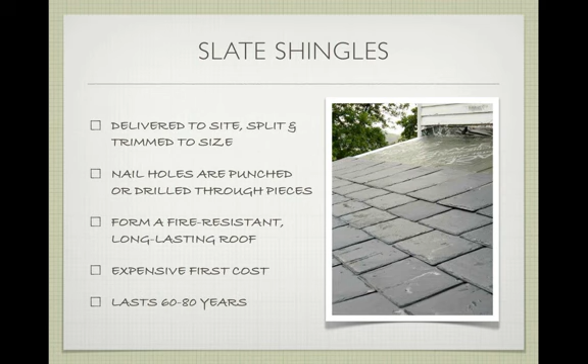Certainly. Is there a place you might not want to have slate, just for the environment? You're saying like in snow conditions or something? Not that I'm aware of.

I think you can have it because it's not the type of material that's going to expand and contract a great deal, so it can withstand temperature extremes. I think the biggest barrier to slate is more the cost than anything else, and that it's certainly going to be a little bit grippier. So if you had huge snow loads and wanted to shed that weight so your building wasn't supporting it all, you might pick something like a standing seam metal roof that has a nice chute to get rid of the snow. So it's going to vary a bit based on that, but I don't think the material itself would have any limitations.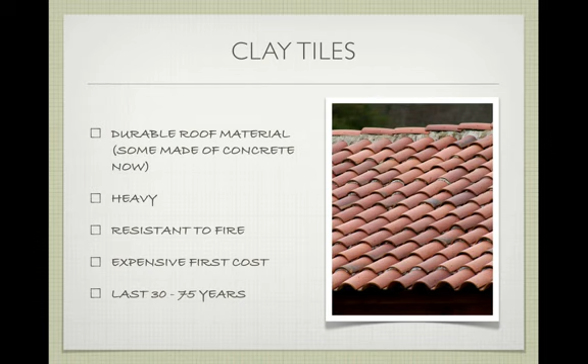So if we're looking at actually how it's put together, this is not the concrete tile that looks like a clay tile, this is the actual terracotta tile. How do you lay it? If we're looking at the section—I apologize, this is a little blurry, it's out of the book itself.

We have a couple pieces here that are boards standing on end. This little blocking allows you to attach the top piece of the tile. Then you flip the tile to have the underside here, to have the pattern where it overlaps and underlaps. Does that make sense? So if water were to fall, it falls into this channel and runs out. You can tell if a roof is actually a true terracotta clay tile roof by this kind of pattern on the roof edge itself.

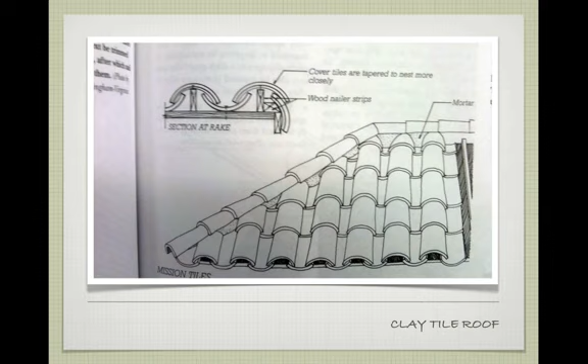If it's a concrete tile, it'll look similar, but it's slightly different. This is the traditional clay tile, so I'll leave this slide up while we talk a little bit about the terracotta-looking tiles. These are examples of concrete tiles that are meant to look like the terracotta tile.

These are the kinds of things that are ridiculously heavy to pass around, but I will pass them around. This is a concrete tile made so that, when it's on the roof, it looks a lot like the terracotta tile I was talking about. It has the pattern, so to speak, but it's designed as a piece of concrete—molded differently, with a little groove that allows two pieces to come together and form what looks like the tile roof. This is more common because it's a little cheaper to make than the actual terracotta tiles, and it's also a little more durable, certainly if you're walking out on it.

Notice that it's very similar to what we've seen. It has a nail hole already punched into it. Usually they also have this little lip—this works for the regular square concrete tile too, which I'll show you in a second—that runs right here. You see that little lip underneath? What you'll do is put a board that runs across your sheathing at that point, which allows you to hook this tile over that board, and it rests on the board.

A lot of times you don't necessarily nail all the tiles anyway, because if there's an edge condition where you want to be able to pull up one of the tiles, it's a little bit easier to pull it up. They're very heavy to begin with, so they're not likely to go anywhere. But these are the kinds of things where you can relatively easily take these off, check something on the roof, and put them back on.

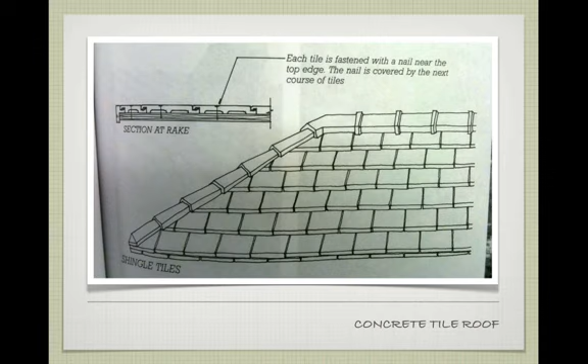And so this has a different look. Again, very, very common in this area to use concrete tile roofs.

It must be laid on the roof. There's usually a minimum steepness that's required for this, so you can't have too low a slope of a roof because you need that to be able to shed correctly. It's always recommended by the manufacturer. This goes for any type of these shingle materials. Asphalt shingles, for example, usually the minimum slope is a 4 and 12 roof - that's 4 inches for every 12 inches of run, 4 feet for every 12 feet. We always stick to the foot, the 12, because it's a consistent measurement, and then the other one varies.

So the last type that we'll talk about is architectural sheet metal. These sheets need to be spaced close enough to secure them against wind and uplift, and to absorb expansion and contraction of the joints. I only have one real example of this here, so I'll pass this around.

Be careful of the edges. It's not particularly sharp compared to some of the other stuff that I've passed around, but I at least want you to be aware of the edges.

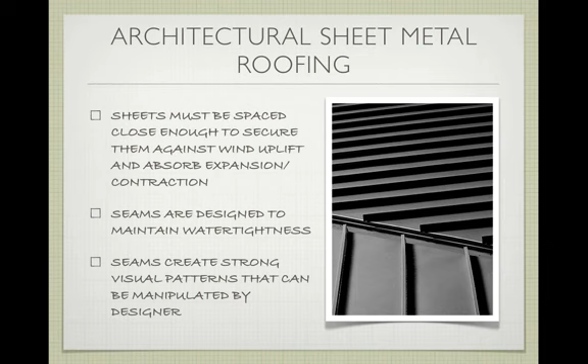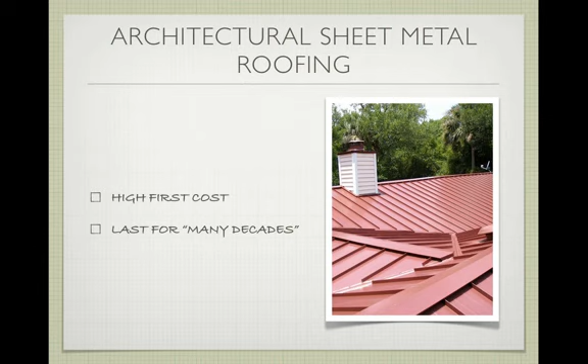The seams are designed to maintain water tightness, and the seams create a strong visual pattern that could be manipulated by a designer. So where those little grooves and seams occur is something that can be considered. It's generally a pretty high first cost, and the book says that it lasts for, quote, many decades. That's a nice vague answer. Again, as with any of these roofs, it's a lot dependent on the maintenance and how well they were installed to begin with as to how long they're going to last. The material itself also varies depending on its thickness or its gauge.

So in terms of metal types, we have a variety. Lead is the softest, it's easily formed. It was used a lot, but it's toxic, so we've kind of phased that out, as with everything that's toxic. Copper is non-toxic, which is good. It's relatively soft, and it has this really cool bluish-green patina when it weathers. People love to use it in salt environments because it has this patina that happens, and it's relatively resistant to that corrosive nature of the salt.

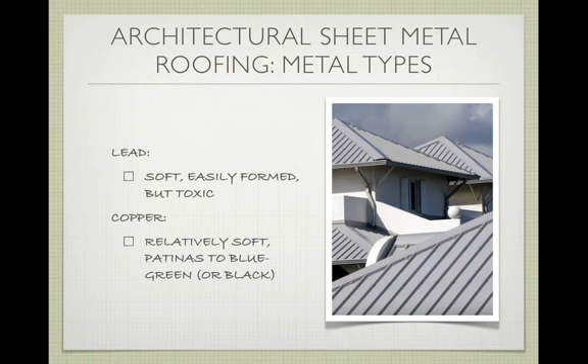So it's something to consider. It is very, very expensive. It used to be not as expensive as it is now, but it's very expensive. If you've ever bought electrical wire or something, you realize how expensive copper is now. That's why people steal wire, so it's something to be aware of.

We can use stainless steel or titanium - architects think of things like Frank Gehry, but the concept is the same. It's strong, it's very long lasting. The problem is it's very difficult to work with because it's such a rigid, difficult material. It's very strong and very resistive. So a lot of, for example, these panels, if they have any curvature to them, they need to be pre-made in a factory setting. It's not something where you can do it on site. It generally is going to maintain a silvery whitish color.

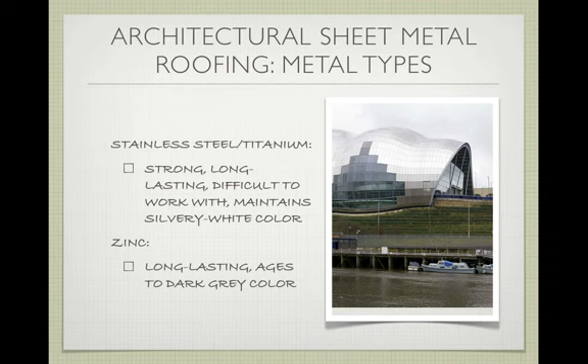Zinc is long-lasting, but it ages to a very dark gray, dull color. So it would be a zinc-coated steel, most likely. There are other metals—most common, the one I passed around is a good example, is an aluminum metallic coated steel.

The one that I passed around is aluminum, but it's coated with a special paint that allows it to maintain a variety of colors. In this instance, I think it was a bluish green, but you can get it in any color you want. Ideally, that paint isn't going to chip or flake away off the surface of the metal—it's designed not to do that. So it's better than just taking a piece of metal and painting it. It's done in a factory, that sort of thing.

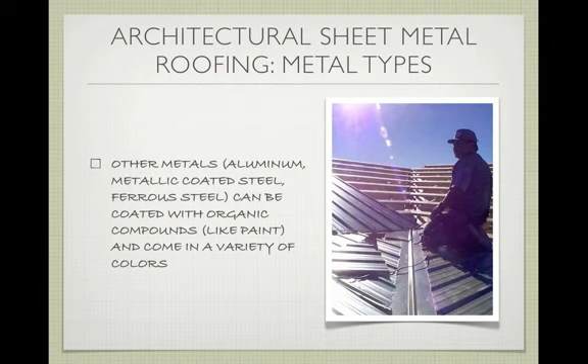You can get that coated steel roof, although it's most common that you're going to get an aluminum roof to begin with. So if you're doing something like that, chances are something like this is going to come to the building site, ideally, because you can make a continuous length piece of roofing without having to put seams in. Whenever possible, this is a really good advantage.

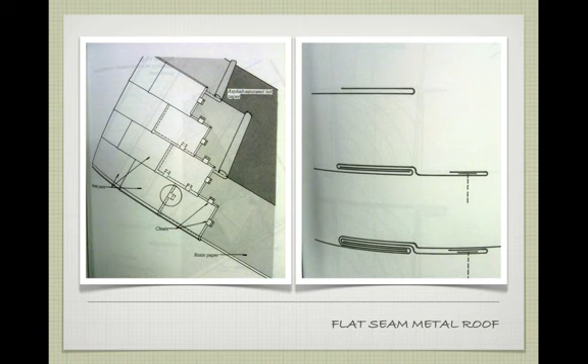The other option, which I'm more familiar with, is called a standing seam metal roof. This is where those continuous sheets are particularly useful. Instead of having these joints that happen here, it would be a continuous sheet running up the face of the building. In this instance, we have a piece of metal that's L-shaped, so one of these sheets has an L on either side.

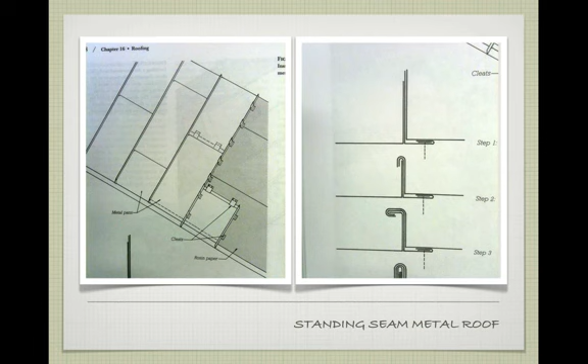We have a cleat that's put in here with the little nail that runs up in between the two, and then we have the opposite side L that comes in. Then we'll take and bend these two longer pieces, the L, over on top of this piece. Then we'll fold this whole assembly over one more time, and we'll end up with a seam—well, of course it's cut off. By the time we fold this over, it doesn't allow the water to get through because we folded that seam over. But it stays standing, so it stays having a little ridge down each section of roof.

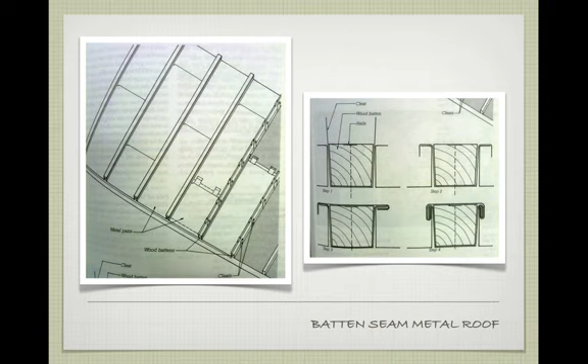We can do it where it's a little bit larger, where these seams are larger with a little batten—where we have a little wooden batten that's in between the two, and we cap it and then fold over each of those. It's like the standing seam metal roof, but it's wider, so it has a slightly different look to it that can be advantageous.